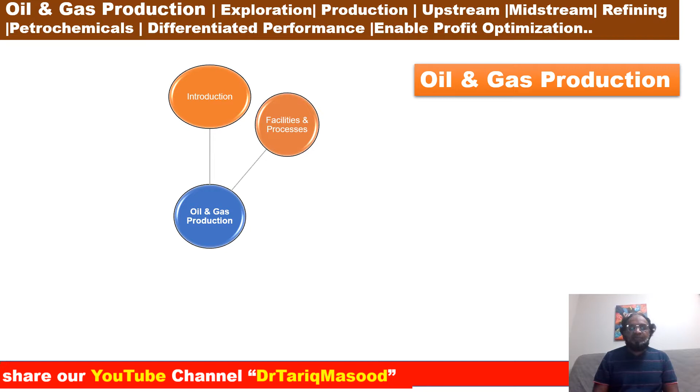Okay, oil and gas production. Introductions, we have discussed facilities and process management systems, reservoir and wellhead management systems. We have also discussed upstream facilities, midstream facilities, refining facilities, and petrochemical production facilities. Now we have started utility systems. After that, we will discuss unconventional and conventional resources and environment effects.

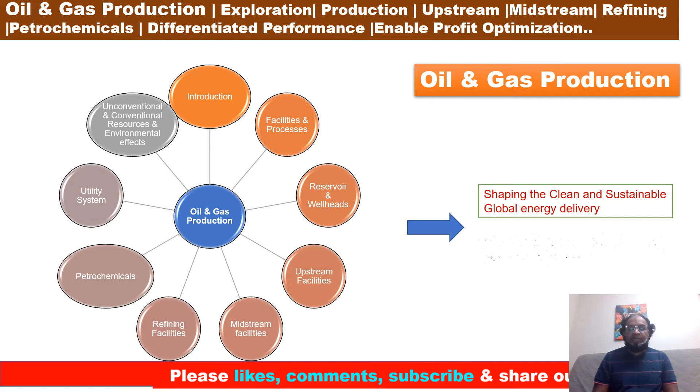What is the ultimate goal? Shaping the clean and sustainable global energy. Planned to deliver more than 300 lectures next couple of years.

Okay, oil and gas production, Utility System, lecture number 33, safety management system. Today we are going to discuss.

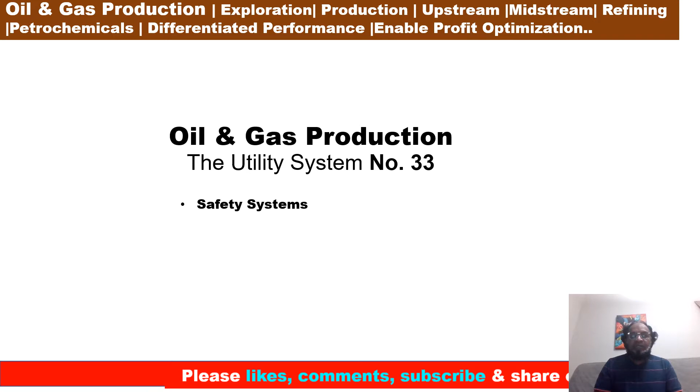Lecture number 33, key takeaway points: safety, systems and functionality, HAZOP, HAZID, SIL, ESD, PSD, protections and mitigations layers.

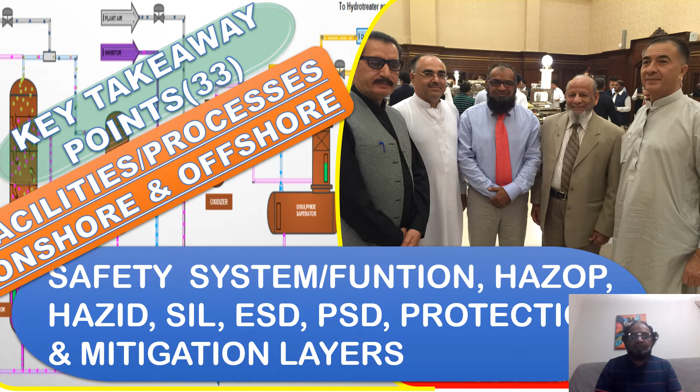Okay, safety system and functional safety. The function of the safety system is to take control and prevent any undesired event when the process and the facilities are no longer operating within normal operating conditions. Functional safety is the part of the overall safety of a system that depends on the correct response of the safety system to its input, including safe handling of operator errors, hardware failures, and environmental changes like fire, lightning, etc. The definition of safety is freedom from unacceptable risk of physical injury or damage to the health of people, either directly or indirectly.

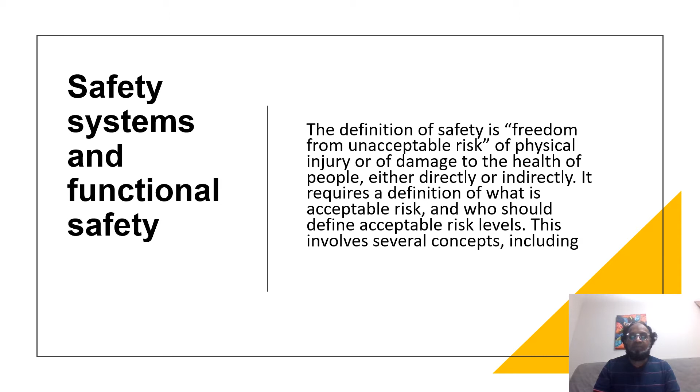It requires a definition of what is acceptable risk and who should define acceptable risk levels. So this involves several concepts. First, we will discuss identifying what is the required safety function, meaning that the hazards and safety functions have to be known.

Okay, safety system and functional safety. First, the definition of safety is freedom from unacceptable risk of physical injury or damage to the health of people, either directly or indirectly. It requires a definition of what is acceptable risk and who should define acceptable risk levels. This involves several concepts: number one, identify what the required safety functions are; second, assessment of the risk reductions required; number three, ensuring the safety function performance; and number four, some of the primary international standards set what safety should be, like this.

Okay, first, identifying what the required safety functions are, meaning that hazards and safety functions have to be known. A process of function reviews, formal hazard identification studies called HAZID hazard, and hazards and operability studies (HAZOP) and accident reviews are applied to identify the risk and failure modes.

Okay, number two, assessment of the risk reduction required by the safety function. This will involve a safety integrity level, SIL, assessment. A SIL applies to an end-to-end safety function of the safety-related system, not just to a component or part of the system.

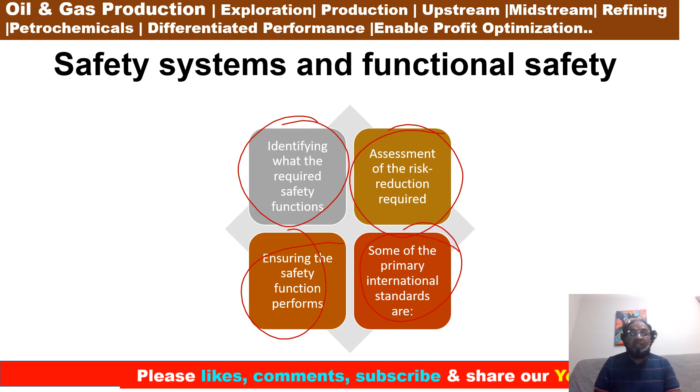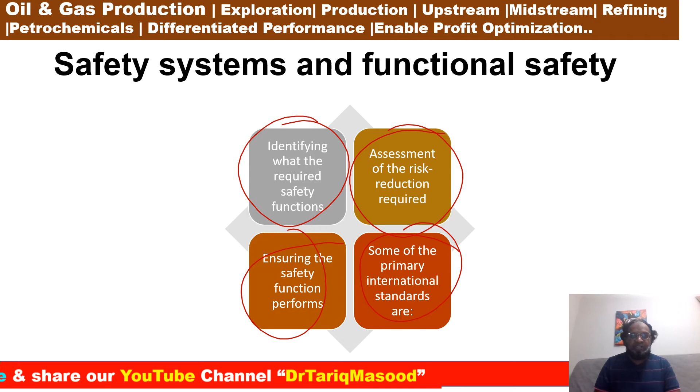Okay, number three, ensuring the safety function performs to the design intent, including under conditions of incorrect operator input and failure modes. Functional safety management defines all technical and management activities during the life cycle of the safety system. The safety life cycle is a systematic way to ensure that all necessary activities to achieve functional safety are carried out, and also to demonstrate that the activities have been carried out in the right ways.

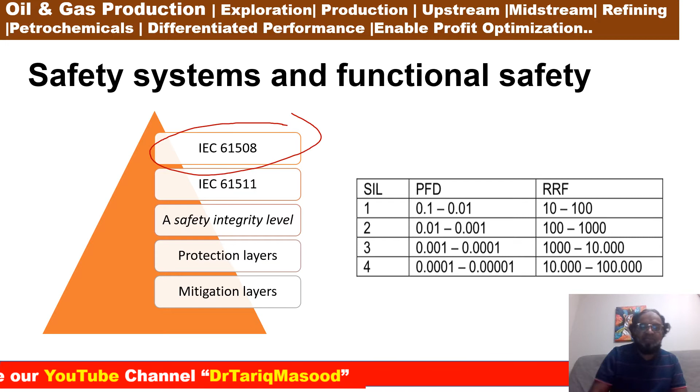Okay, furthermore, safety system and functional safety. For the oil and gas industry, safety standards comprise a set of corporate, national and international laws, guidelines and standards. The first standard, IEC 61508, functional safety of electrical, electronic, programmable electronic safety-related systems. Number two, IEC 61511, functional safety instrumented systems for the process industry sector.

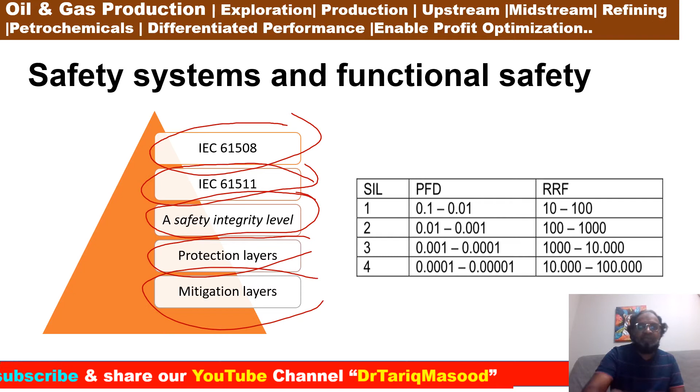Okay, number three here is safety integrity levels, then protection layers and mitigation layers. A safety integrity level is not directly applicable to an individual subsystem or component. It applies to a safety function carried out by the safety instrumented system, end-to-end, sensor, control and final element.

IEC 61508 covers all components of the E/E/PE safety-related system, including field equipment and specific project application logic. All these subsystems and components, when combined to implement the safety function or functions, are required to meet the safety integrity level target of relevant functions. Any design using supplied subsystems and components that are all quoted as suitable for the required safety integrity level targets of the relevant function will not necessarily comply with the requirements for that safety integrity level or target.

Suppliers of products intended for use in a PE safety-related system should provide sufficient information to facilitate demonstration that the electrical equipment safety-related system complies with IEC 61508. This often requires that the functional safety of the system be independently certified.

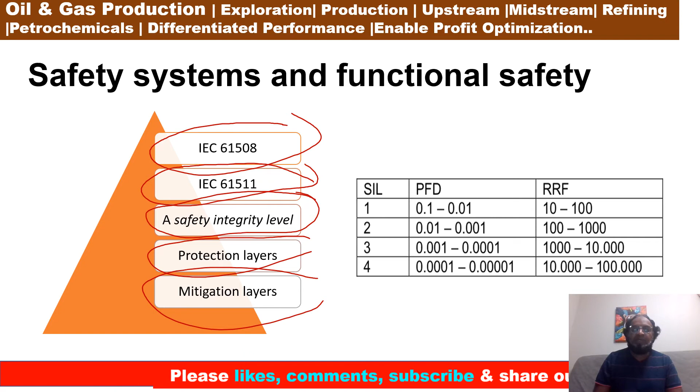SIS is a collection of sensors, controllers, and actuators that execute one or more SIF functions, or loops, implemented for a common purpose. Each SIF has its own safety integrity level, SIL, and all sensors, controllers, and final elements in one SIF must comply with the same SIL limits.

Safety system and functional safety. First, we will discuss ESD, the emergency shutdown system, used to handle emergency conditions and high critical shutdown levels. Number two is the process shutdown system, PSD, used to handle non-normal but less critical shutdown levels. Number three is the fire and gas system, used to detect fire and gas leakage, and to initiate firefighting, shutdown, and isolation of ignition sources.

SIS senses hazardous conditions and takes actions to move the process to a safe state, preventing an accident from occurring. The next topic is the amount of risk reduction that an SIS provides, represented by its SIL, which is a measure of the risk reduction factor provided by a safety function.

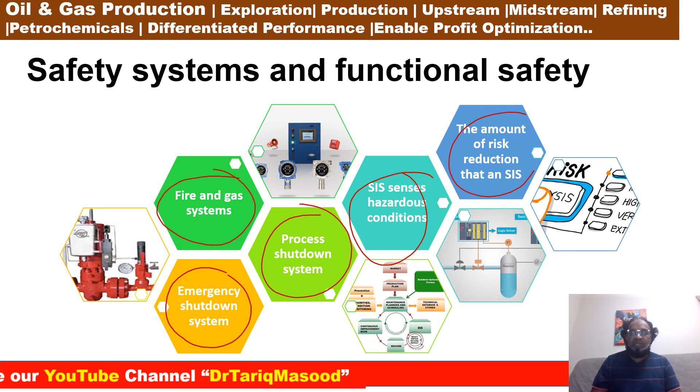IEC 61508 defines 4 levels of SIL, and the corresponding requirements for the risk reduction factor, RRF, and probability of failure on demand, PFD, we are going to discuss on the next slide. This is my last slide, then we will conclude today's presentation.

The first point is the safety, freedom from unacceptable risk. Second point, safety integrity levels. Number three, PFD, probability of failure on demand. And then RRF, risk reduction factor, and safety instrumented system, SIS.

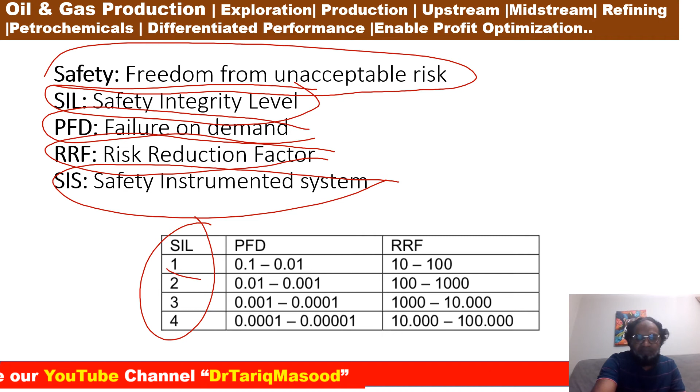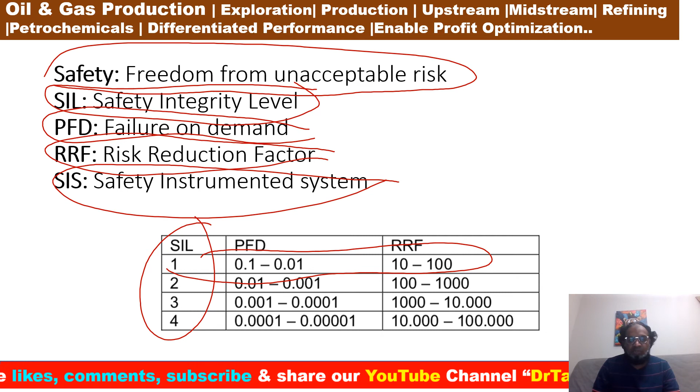We are going to discuss the 4 sets of SIL. For SIL level 1, the probability of failure on demand, PFD, will be 0.1 to 0.01, and the RRF will be 10 to 100. If SIL level is 2, the probability of failure on demand will be 0.01 to 0.001, and RRF, risk reduction factor, will be 100 to 1000.

For SIL level 3, the probability of failure on demand will be 0.001 to 0.0001, and the risk reduction factor will be 1000 to 10,000. For SIL level 4, the probability of failure on demand will be 0.0001 to 0.00001, and the risk reduction factor will be 10,000 to 100,000.

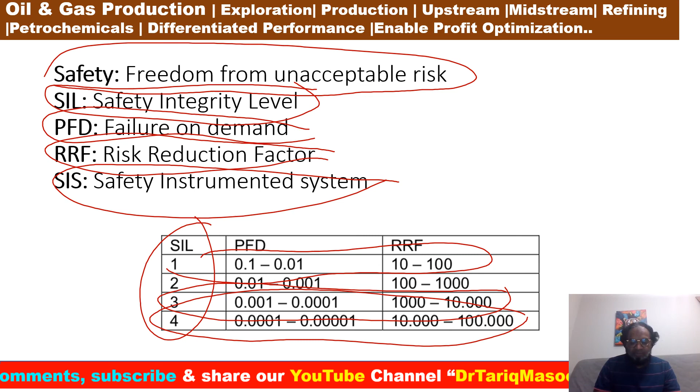Thank you very much for your patience now. This is my conclusion page. Today we have discussed the safety system and its functional safety.

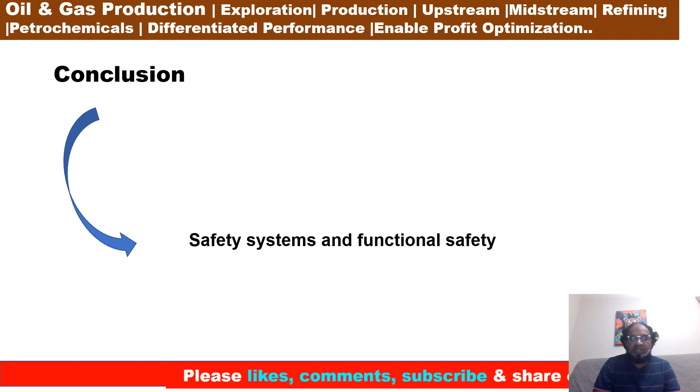Next topic, we are going to discuss the emergency shutdown and process shutdown.